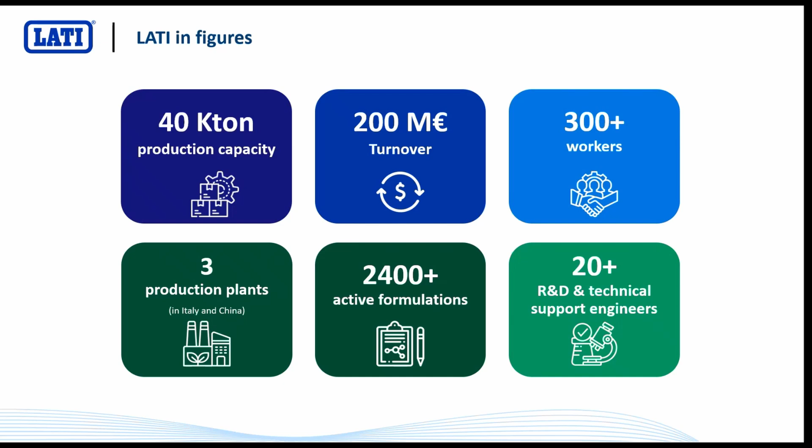But 2,500 grades is a lot to try and get your head around, and I'm not going to try and cover all of those in this presentation. But let's just take a quick look at some of the sorts of materials that LATI offers. The headline point here is that we focus on high performance materials with enhanced functionality.

If we start by looking at the polymers that we offer, well, it is everything from polyprop to PEEK, and it's semi-crystalline materials and amorphous materials. For LATI, let's say a standard entry-level material might be something like a 20 or 30% glass-filled nylon, and typically then we would go above that in terms of complexity and performance of polymers. Where we do dip down into the commodity materials at the bottom of the polymer pyramid, it would always be with some other functionality, be that conductivity, flame retardancy, and so on.

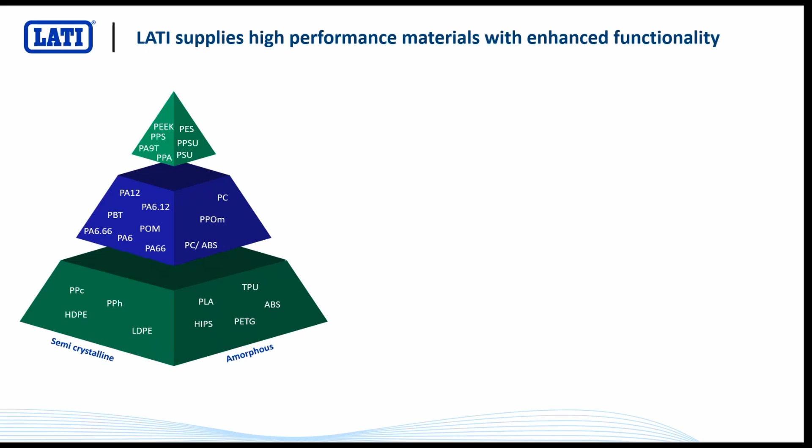So let's have a little bit more of a look at what those functionalities are. I'm not going to go through all of these today, but just give you a flavour of some of the more common ones.

Let's start then with structural materials, and we're going to look at these in a bit more detail today. These are grades with very high loadings of reinforcement, designed for the most mechanically challenging applications—like we're going to talk about today, applications for replacing metals in many cases.

Flame retardants is where LATI made its name. This is our biggest range of materials, flame retardant materials, and it's been that way since the company was founded, more or less. Of the 2,500 grades that we currently produce, around 300 of those are grades with active UL yellow cards, and we have lots of other flame retardant certifications and approvals beside that. We have grades based on everything from what we might call the traditional halogenated flame retardants and red phosphorus systems, through to systems that are halogen free, red phosphorus free, and increasingly important, grades that are free from antimony trioxide.

After the flame retardants, the next largest family within our range is the self-lubricating materials. Again, much like the flame retardants, we have self-lubricating grades based on everything from polyprop at the bottom of this pyramid all the way up to PEEK at the top, with multiple grades based on each polymer. And like the flame retardants, with the self-lubricating materials, we have different ways of achieving the target performance.

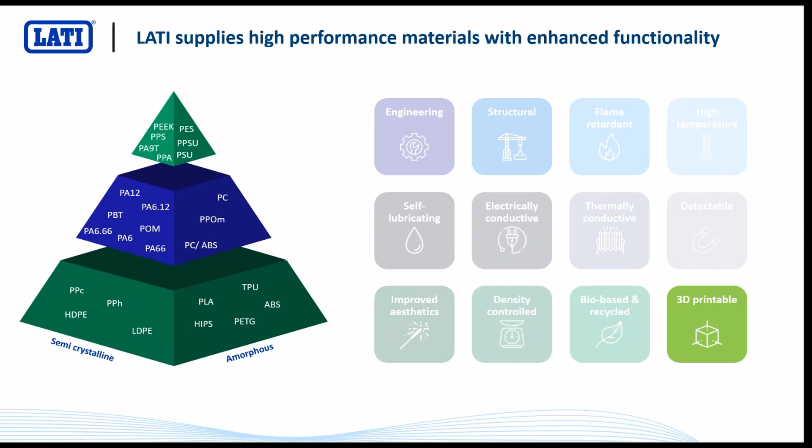One of the big applications we're working on at the moment is mold tooling for composites processing, the sort of thing you might find in high-performance, low-volume vehicles. We also have materials that can be used for large-scale prototyping, such as aerodynamic or ergonomic assessments.

We have a global presence. We're particularly strong in Europe, but we have direct sales presence in a number of areas, including manufacturing, as I mentioned, in China. We also have a partner in the US that we use for toll manufacturing and distribution, so we're able to offer locally produced, locally manufactured compounds to our customers in the US as well as in Asia.

And very recently, in the last couple of weeks, we've just announced a new joint venture with a compounder in India, which again gives us the facility to manufacture and supply locally manufactured products to our customers in India and in that region as well.

Finally, then, a quick look at some of the applications that we support.

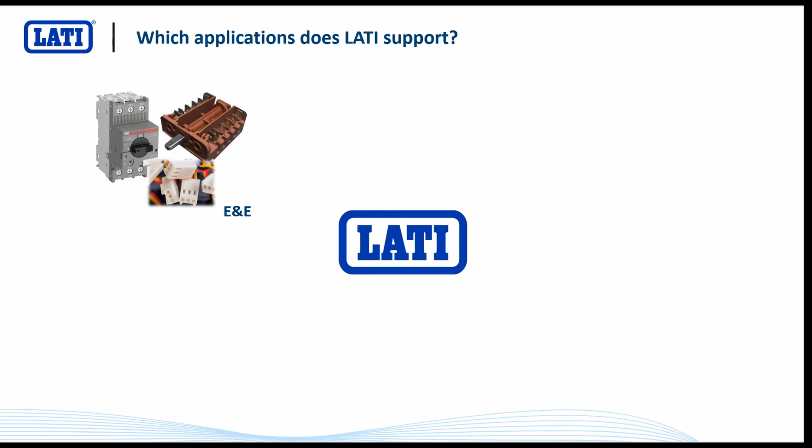The biggest area for LATI is the electrical and electronics market. This is a market with very stringent performance requirements, fire performance typically, but we also have applications for self-lubricated materials. We're talking about parts with very tight dimensional tolerances, and generally high volume applications as well. So high volume, strong technical requirements.

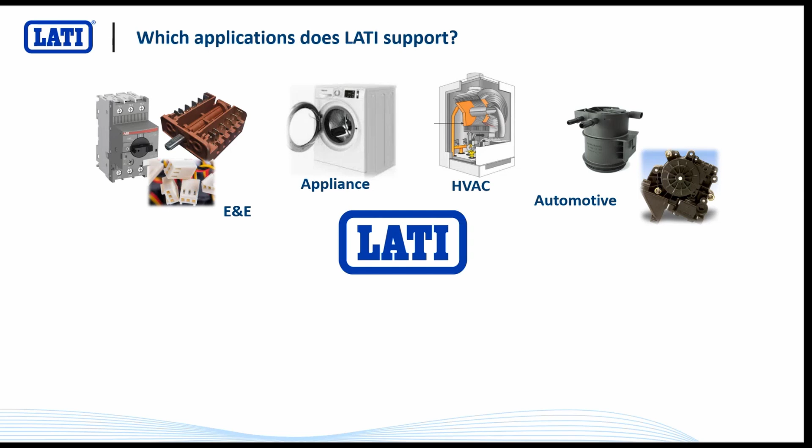Similarly, in appliances, this is another area with very stringent fire performance requirements, but also requirement for very high volumes of material. Other areas we work in include HVAC, automotive, so we are IATF certified. We supply a lot of materials into food and water applications, so we have grades that are EU food and water contact approved, FDA approved, and so on. Lighting I've mentioned, and we'll talk about a bit more later. We work in railway, medical, safety, and a variety of industrial applications.

So I guess the common thread here is that all of these are demanding applications, high performance requirements, often requiring high volumes at the same time.

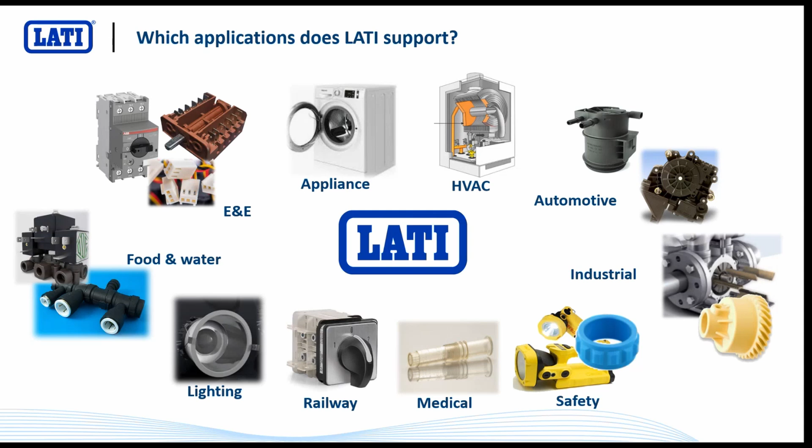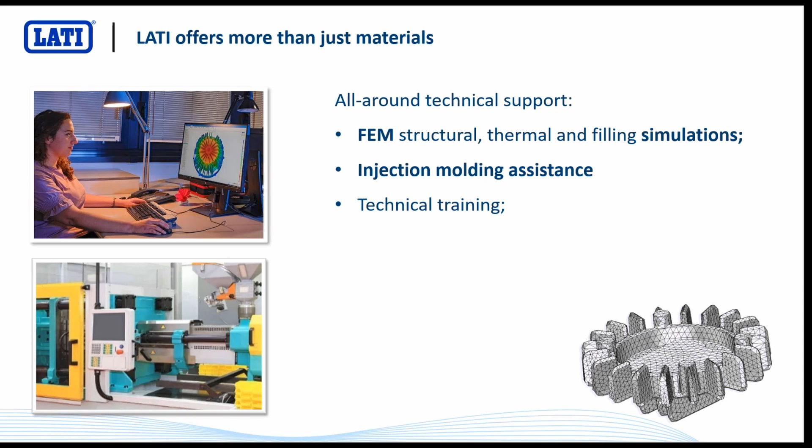And as I said right at the start, with LATI, it's not just materials, it's the complete package of services as well. That might involve things like providing structural analysis, thermal simulations, filling simulations - we'll have a look at some of those shortly. It might be hands-on assistance with the injection molding process itself, or some technical training for our customers. And if we're talking about developing new materials, then that obviously involves extensive R&D work, lab testing, and continuous product tuning.

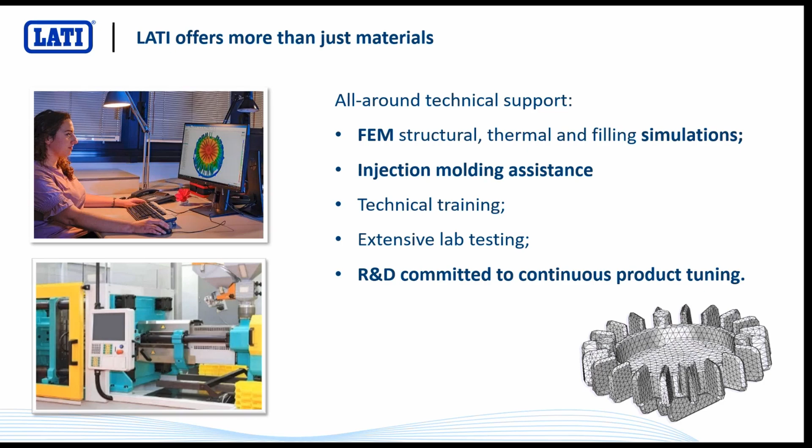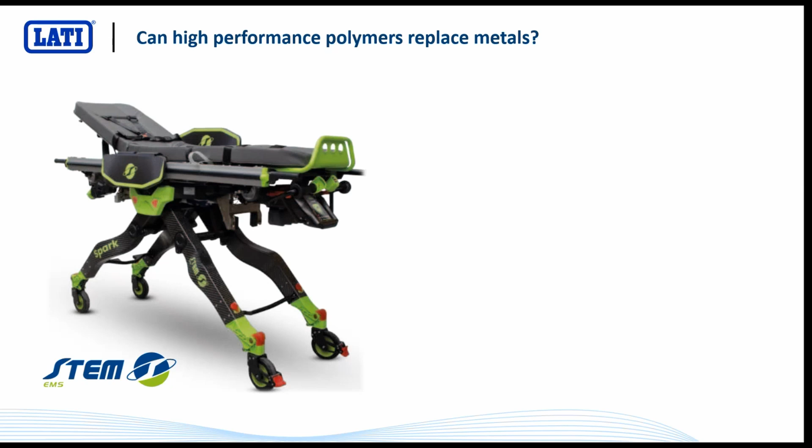Okay, so that's enough intro for one presentation. Let's get on to what we really want to look at today. Really it's to try and answer this question: can high performance polymers replace metals? And we're going to try and answer that question by looking at a couple of case studies. The first one is this robotic stretcher, and the second one is an LED lighting device. So let's move straight on to the first one.

So case study number one is what's called the STEM Spark. It's the world's first robotic electric stretcher. Quick introduction to STEM - they're an Italian company specializing in retractable steps of various types, for industrial or marine applications, also for medical applications. So the one we're going to look at here today is this medical application.

Yes, for this robotic stretcher. So let's take a closer look at it. I guess the key features of this are its robotic undercarriage and the ability to handle multifunctional accessories.

To give you a bit of background, this Spark product was originally designed to accommodate highly infectious patients, around COVID time. You can see here in this picture this isolation unit which sits on top of the main body and legs of the stretcher. It's got all sorts of ports to allow medical professionals to access patients safely, and also to keep those patients isolated at the same time, and various ports for connecting different bits of medical equipment, machinery, and monitoring.

So that was the original intention of this device. And then as that big surge in demand and requirement for isolation tailed off a little bit, as COVID was brought more under control, this product was reimagined more as a general purpose multifunction device, initially designed for the US market.

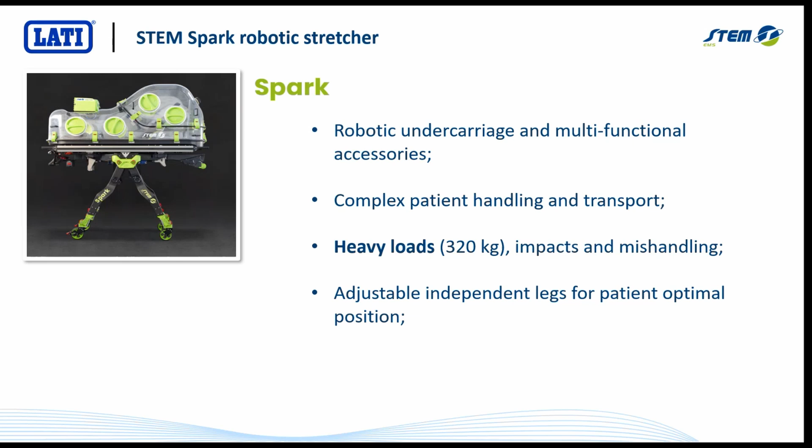One of the key features of the device are its independently adjustable legs for making sure the patient is in the optimal position. We'll see it here in, let's say, a standard configuration, but each pair of legs, front and back, can splay out independently of each other. The idea is that you can always keep the patient in an optimal position. Here it's shown on an incline, but more commonly you'd be keeping the patient horizontal as the legs adjust to deal with inclines, as you're moving the patient around or getting them on and off an ambulance.

So what you need for all of this is something that's lightweight, and it's got to be impact resistant. You'll probably see that for the main body of the legs here, these are made of carbon fiber material, so lightweight, strong, stiff materials. You need something that's resistant to the cleaning fluids and various other things you'll find in a hospital setting. It's got to have this overall structural lightness and impact resistance, so high performance plastics are an ideal candidate for this sort of thing.

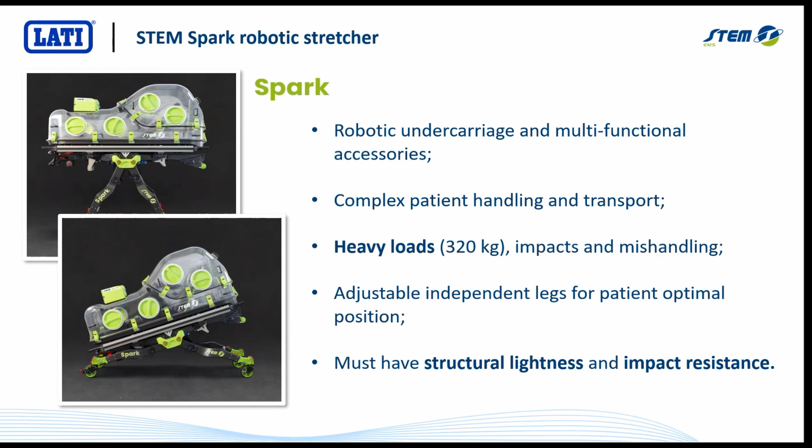Of course, it's got to have this static load resistance, but also creep resistance as well. We talked about impact resistance. Dimensional stability is very, very important - is it going to retain its shape post molding?

Particularly important for two things. Firstly, you've got those two components that need to be able to freely move past each other, so it's no good if you've got distorted parts coming out of the molding. And then also, this section of the part fits inside the carbon fiber tube of the leg, so it's important we've got tight dimensional tolerances so we can correctly fit this into the leg and connect it accordingly.

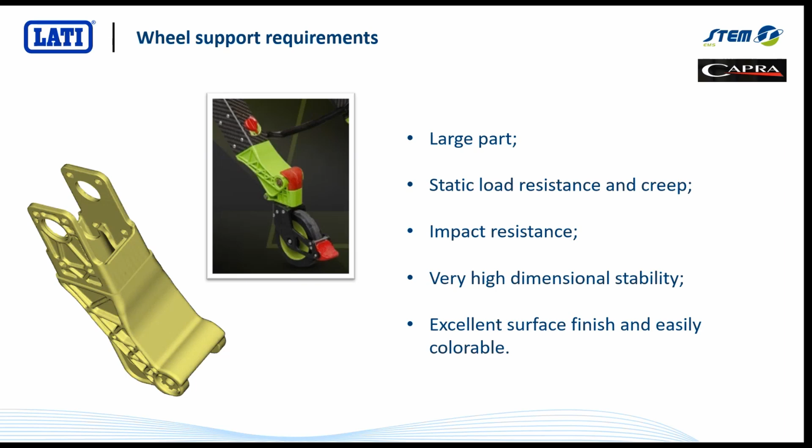Step one then is choosing what we think would be a suitable candidate material. Fairly obvious looking at the mechanical requirements, we're looking at something from within LATI's structural material range.

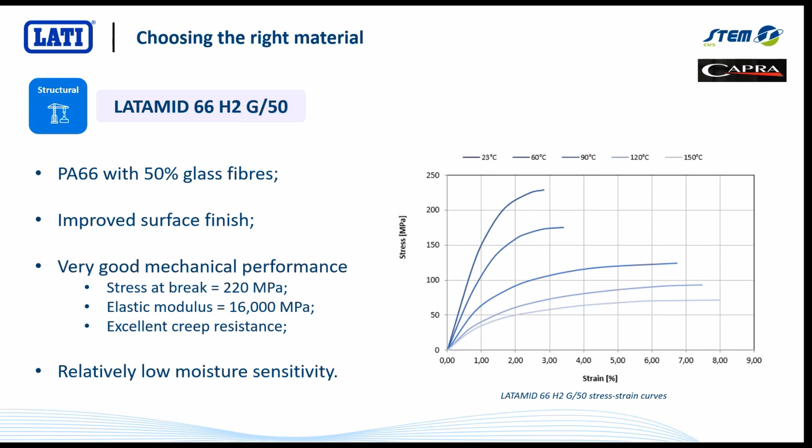The material we opted to open with here is a material we call Latamid 66 H2 G50. This is a nylon 66 with 50% glass fiber, amongst other things in there. It's a grade with improved surface finish and very, very good mechanical performance - strength above 200 megapascals, modulus around 16 gigapascals, and it has the excellent creep resistance we need for this application. Just a note, you might be thinking, why don't we use carbon fiber rather than glass? Too brittle for an application like this, really. If we want good impact performance, glass typically has better impact performance than carbon. So glass is the reinforcement we need for an application like this. And for a nylon 6/6, it's got relatively low moisture uptake, this material.

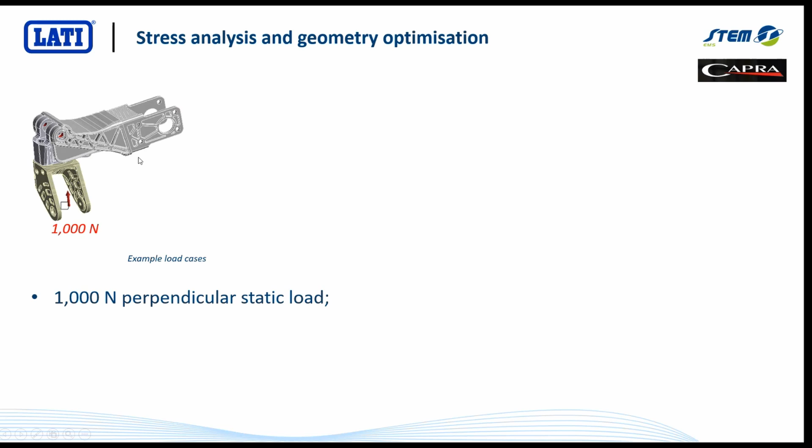Once we've picked a material we think is a good candidate, the next thing we would do on a project like this is carry out some structural analysis. These are some of the loads we looked at, and some of the requirements from STEM - we've got static loads, in this case with this component perpendicular to the load. We need to think about lateral loads as well, in combination with those perpendicular loads, and we need to consider all these different load cases with this hinged component in different configurations - in what would be the fully flat position, but also the fully open position as well.

The customer set some pretty high impact load requirements for this application, and I'll be honest, this was a very challenging impact load to try and meet. I think it's fair to say the simulation never quite showed that this was met. It was really a case of getting as close as we possibly could to enable the parts to go into real world testing with reasonable confidence that it would deliver the desired performance. So that was really the target here, around this 8,000 Newton impact load.

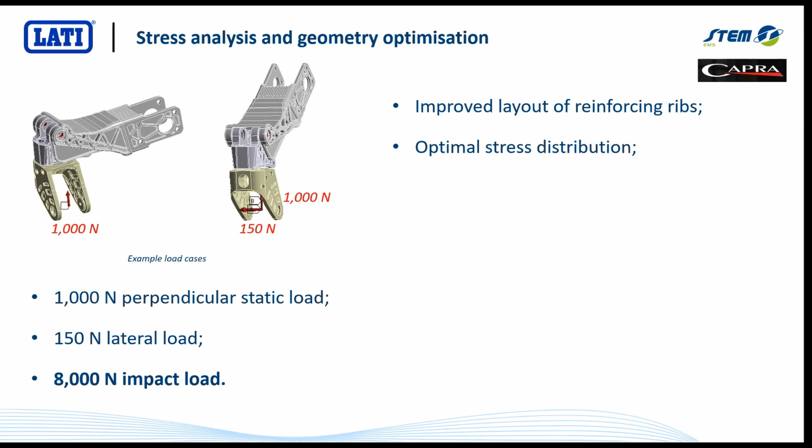As we're doing all of this analysis, we're making modifications to the geometry and layout of the part. In this case, we had to look at the layout, positioning, and thickness of the reinforcing ribs to ensure we get this optimal stress distribution so the part can withstand the desired loads. Ultimately, we go through several iterations until we get a geometry that fulfills as closely as possible the requirements of the application.

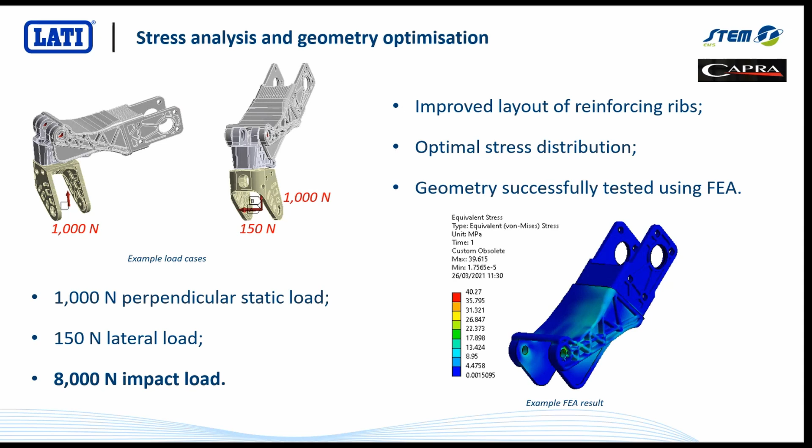So we're now at a point where we have a design we think is going to work. The next thing is, okay, can we actually make that part? And this is where the molding analysis and tool optimization comes in.

I'll be honest, in this project there were a few problems detected by this analysis. One of the big problems was differences in volumetric shrinkage. Normally this is something we'd address by reducing wall thickness, but in an application like this, where we're pushing the boundaries of the mechanical performance we need, it's not as easy as just taking thickness out of the part. That's not really viable.

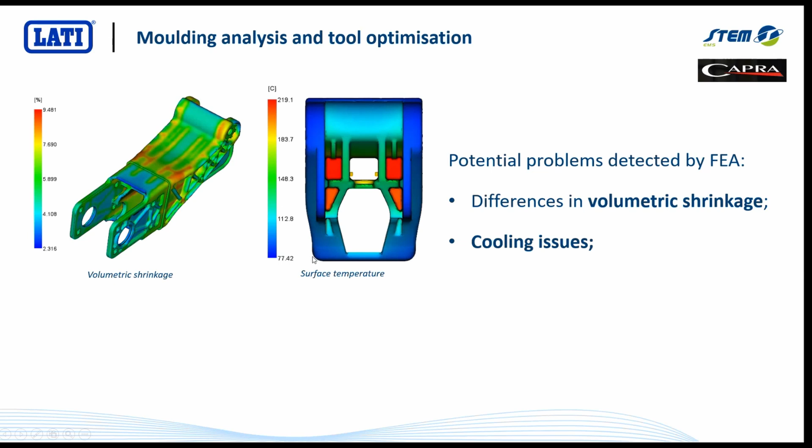There were some cooling issues too, again partly linked to differential part thickness. You can see significant differences in surface temperature of a part as it comes off the tool - as low as less than 80 degrees in some places, but higher than 200 in another. This is the sort of thing that's obviously going to contribute to significant deformation as you demold the part, so something to be avoided.

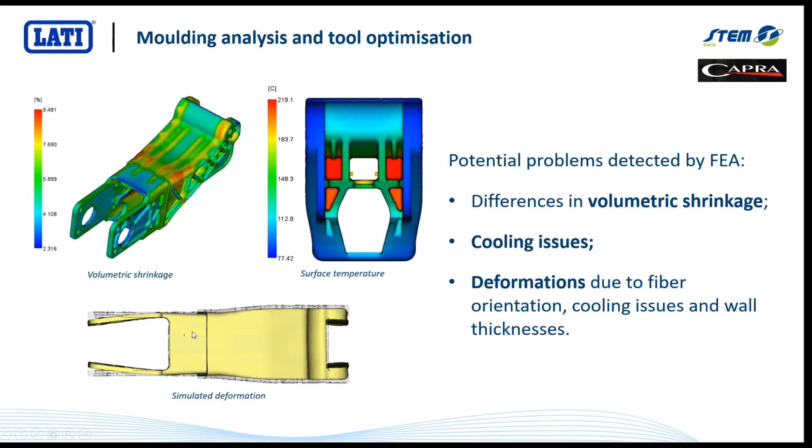If you simulate the deformation that comes from a combination of those two effects above, plus any fiber orientation we get during molding, then what we were looking at is something like this - and this is clearly no good, because this is the end where we want to fasten into the carbon fiber legs.

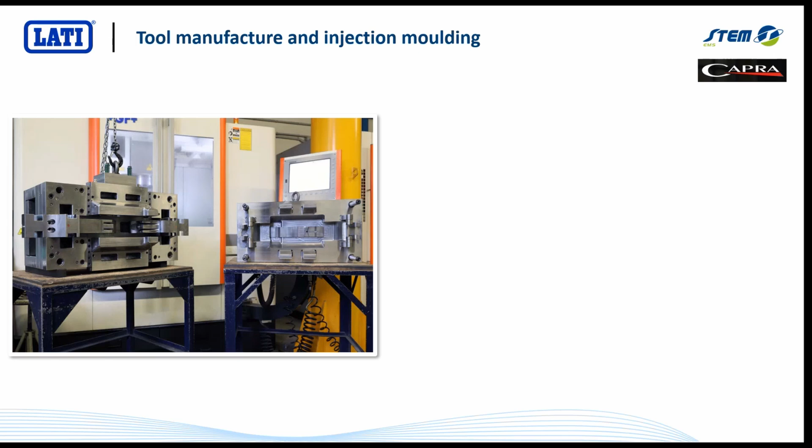At this point it's worth saying this is where it really helps to work with a specialist technical molder who's got experience working with high performance materials like this. Really, Capra Plast took over, and using the information we provided from the analysis, they were able to make a number of modifications to get a part that would actually come out looking like we wanted.

That involved optimizing injection molding locations to get a better fiber orientation in the part. The other big thing it involved was designing improved cooling channels to avoid those big fluctuations in surface temperature that we saw on the previous slide. Through their expertise they were able to do all of this, and the result was a compact and relatively lightweight tool to make these parts.

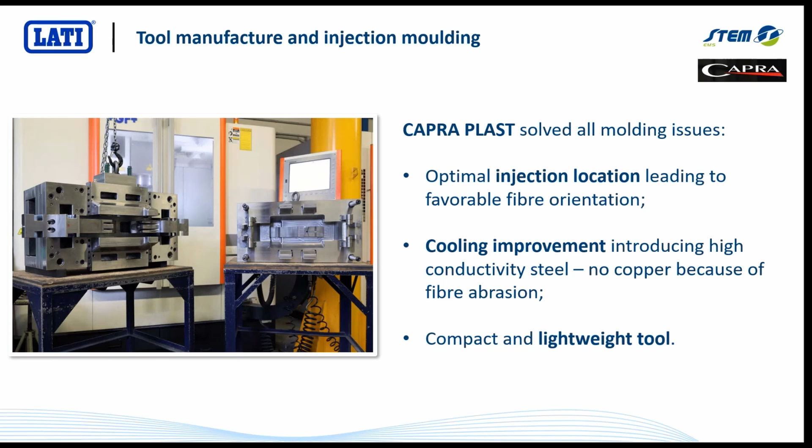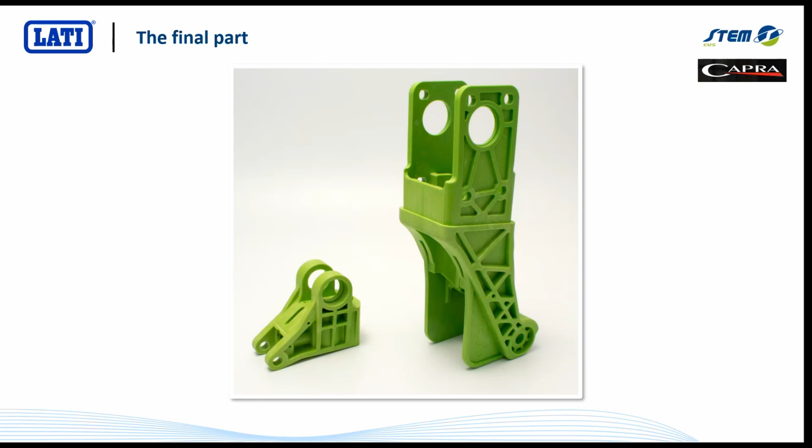So that's case study number one. The second case study we're going to look at is this high-powered LED lamp from Vossloh-Schwabe. If you're not familiar with Vossloh-Schwabe, they are a technology leader within the lighting sector, with a product portfolio covering all kinds of lighting components - everything from lamp holders to LEDs to the various bits of electronics used around all of that. They're a German company with production and sales sites across the world, and this particular case study is one that we developed with their Italian team.

So the product is known as Brave. That's the family name, and it's intended as a modular plug-in replacement for traditional outdoor spotlights. So things like street lighting, industrial lighting, sports facilities, and so on.

Some of the key requirements are IP67 rating, so moisture ingress protection and UV resistance. Must have corrosion resistance, so you imagine all sorts of public places with various fluids and animals that need to be dealt with, and we need to avoid corrosion from all of those sorts of things. So that rules out aluminium in this application. It needs to have a very, very high life expectancy as well.

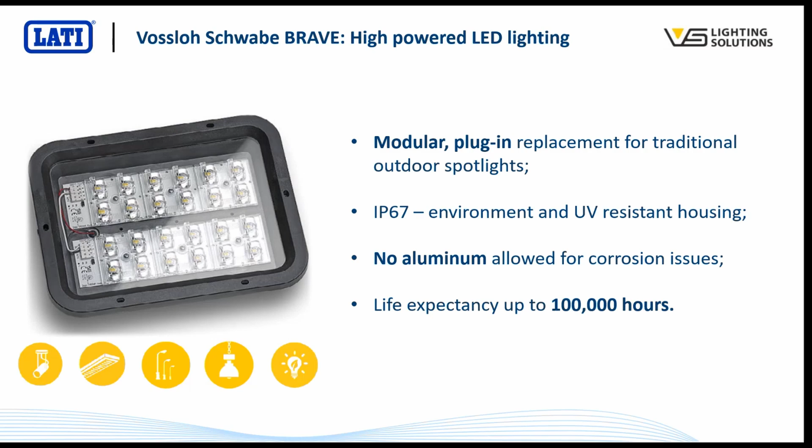So let's start by taking a look at how these sorts of LED lighting modules are typically constructed. So in the diagram here, you'll see we have the LEDs, surface-mounted LEDs, and electronics sitting behind glass. Heatsink is in direct contact behind, and then the whole thing is in a frame, which can be mounted to all sorts of different housings, and there's a gasket in there to keep the moisture and dust and whatever else out of the sensitive bits inside.

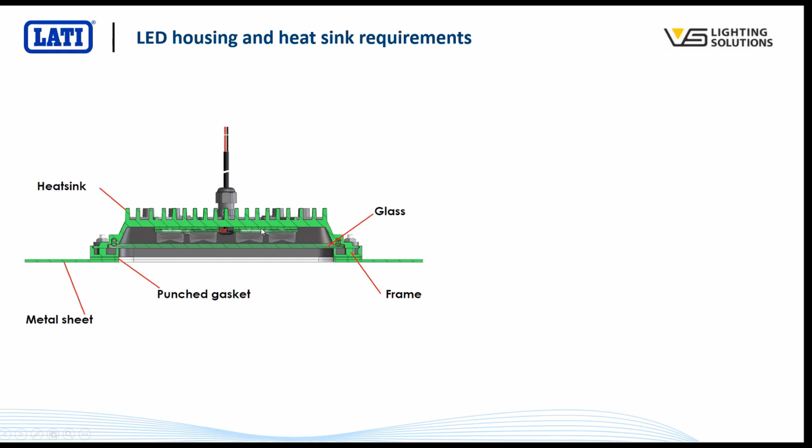So the key requirements of the heatsink part here, which is what we're focusing on, it must have outstanding thermal conductivity. This product is available in a few different configurations, but the highest power one of those is up to 44 watts. So that's quite a lot of heat being generated that we need to get away from the electronics if we want to maximize this lifetime.

We must have dimensional stability. So for the heat sink to work effectively, it has got to be in contact with the components that are generating the heat. We don't want an air gap between those two things. So dimensional stability is important to make sure that we maintain that good physical contact. We need an absolutely flat molding. Otherwise, we're either going to have an air gap, or we're going to have to start using thermal interface materials, which adds an extra process, adds extra costs to the production of these units.

Dimensional stability is also important because, remember, this is a retrofit device. So if we want to take this and plug it into some existing housing somewhere, it's no good if we've got a variety of shapes and sizes because we've got warped moldings.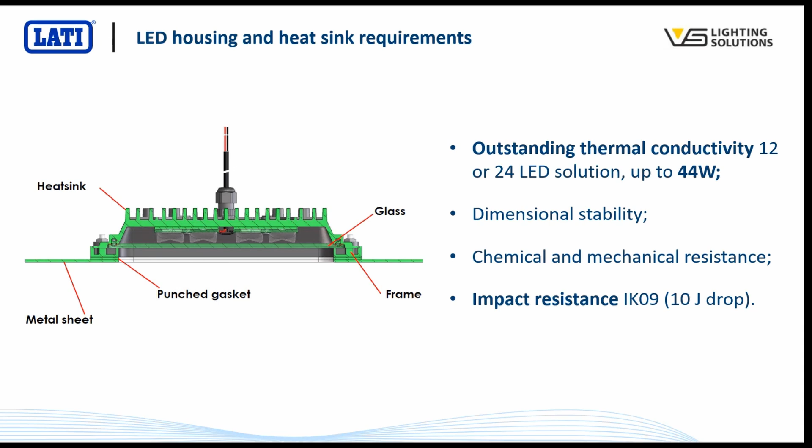Chemical resistance, we talked about. Mechanical resistance is also important too. So these units are going to be installed in industrial areas or public areas. So knocks and scrapes, whether accidental or deliberate, are going to occur. We also need to take into account impact resistance as well. In this case, there was a particular drop test that needed to be successfully passed.

So again, as we did last time, let's start by looking at what sort of material we might use. And I think fairly obviously here we're looking at something from within LATI's thermally conductive material range. In this case, the grade we looked at is LATICONTHER 62 GR/50. This is a nylon 6 material with 50% graphite in there as the thermally conductive additive. So this is a grade with outstanding thermal conductivity. In fact, it's one of LATI's most thermally conductive grades.

It's a grade with improved flowability, so when we look at some pictures later of the part, you'll perhaps appreciate this a bit better. For applications like this, it's quite common to have complex shapes, lots of right angles and corners in there, sometimes relatively thin sections. So good flowability is critical for these sorts of applications.

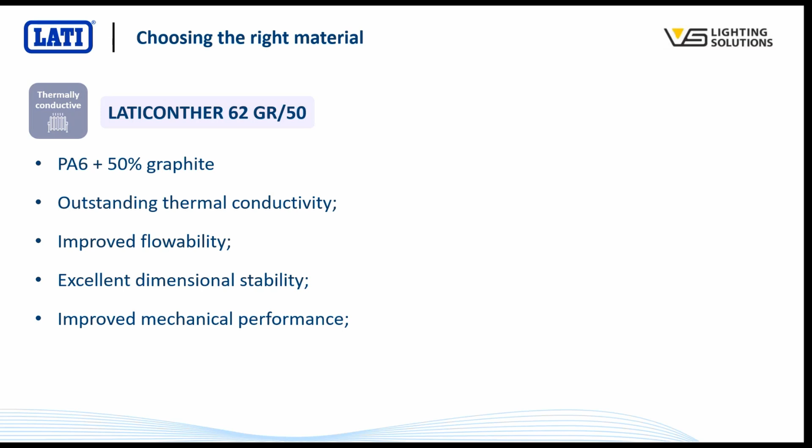We've talked about dimensional stability, and this grade is excellent for that, to maintain that good thermal contact between the heatsink and the heat source. Even though this is a highly filled grade, it still does have very, very good mechanical performance. It also has the ability to withstand self-threading screws.

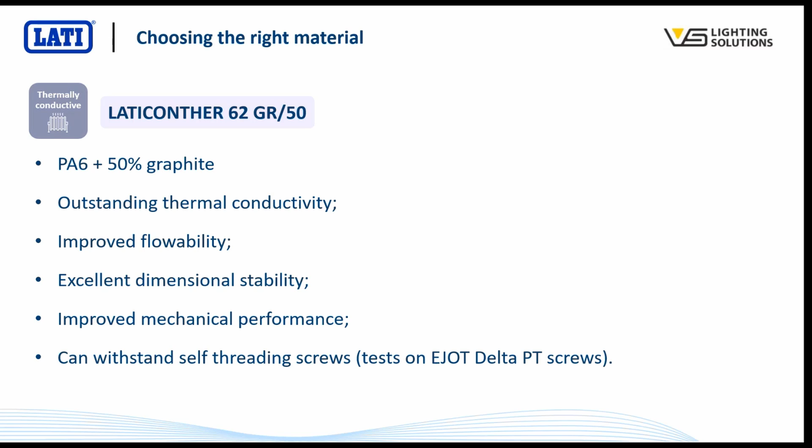Again, particularly important if we're looking at being able to retrofit this thing in a variety of different existing housings. So LATI's done quite a lot of extensive testing looking at different self-threading screws and how well or poorly different materials can accept those. So we have lots of other information available on that. If you're interested, we can make that available on request.

So I guess at this point, I usually like to address the elephant in the room. When we're talking with customers about replacing metal heat sinks with plastic, the big question that always comes up is: can the polymer compound conduct heat as well as aluminium? Well, let's have a look at the data.

We'll look at the thermal conductivity of aluminium versus a couple of different families of thermally conductive plastics. The one we've chosen for this application is in this family, based on graphite as the conductive additive, but we also have others which use ceramics instead of graphite. These have particular uses in applications where you want thermal conductivity but absolutely don't want electrical conductivity.

So let's look at the thermal conductivities. For aluminium, you have a thermal conductivity in plane, along the length of a part, of around 110 watts per meter Kelvin, for die-cast aluminium. Because aluminium is an isotropic material, with the same properties in all directions, the thermal conductivity is exactly the same through the thickness of the part as it is along its length.

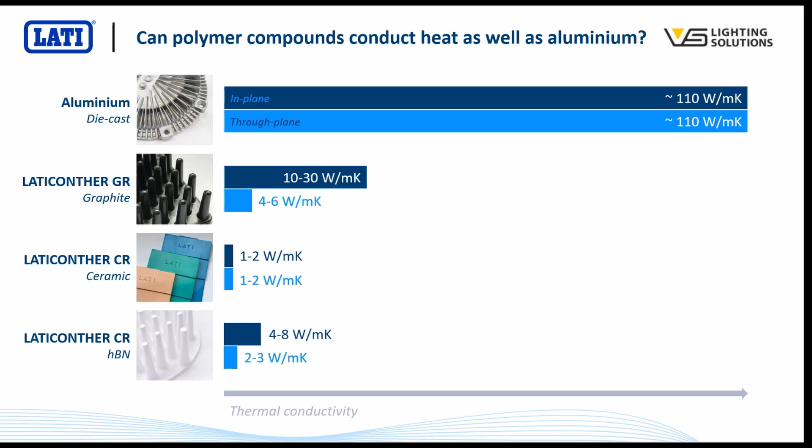So on the face of it, it doesn't look so good for the conductive plastics. But the key point to remember is that for heat dissipation applications, thermal conductivity is not the critical parameter we need to look at. We actually need to think a bit more about how the heat transfer is occurring in these systems.

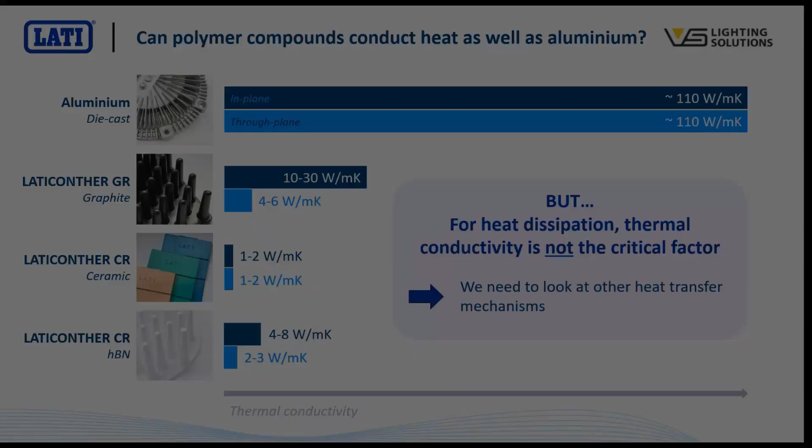At this point, we'll take a brief interlude and revisit a little high school thermodynamics, reminding ourselves of the different heat transfer mechanisms. First, we have conduction - we've got a heat source and heat is transferred through some other object. Here's the heat source, here's the object dropped on top, and conduction is all about heat being transferred through this solid object to its surfaces.

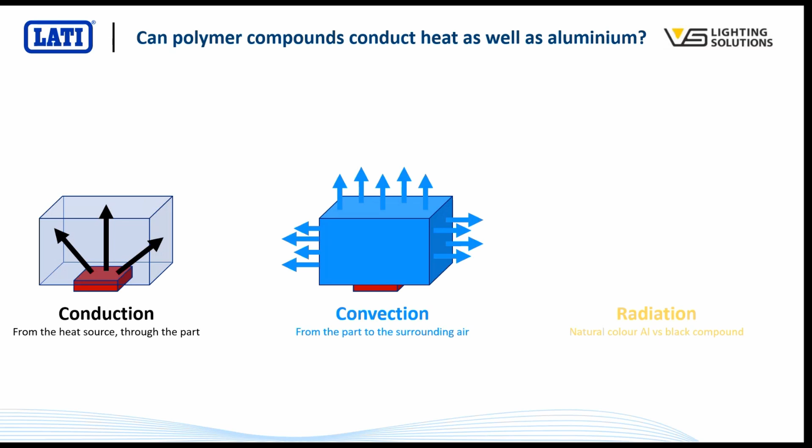Then we have convection. Our part is now being heated up, and convection is all about the heat then being transferred to the surrounding air, or more accurately, the surrounding fluid, whatever that may be. And then finally, we have radiation - this is emission of electromagnetic radiation, and this occurs for any object sitting above absolute zero.

So let's have a look at how plastics and metals compare in these scenarios. We've just seen the data for conduction - aluminium is miles better than a polymer compound.

Now for radiation, it kind of depends, but if we're looking at a natural silvery coloured aluminium versus a black thermoplastic - and these are black because graphite gives that colour to the final parts - then actually a polymer compound radiates heat better than aluminium. But in heat dissipation applications like this heat sink, the dominant heat mechanism is convection.

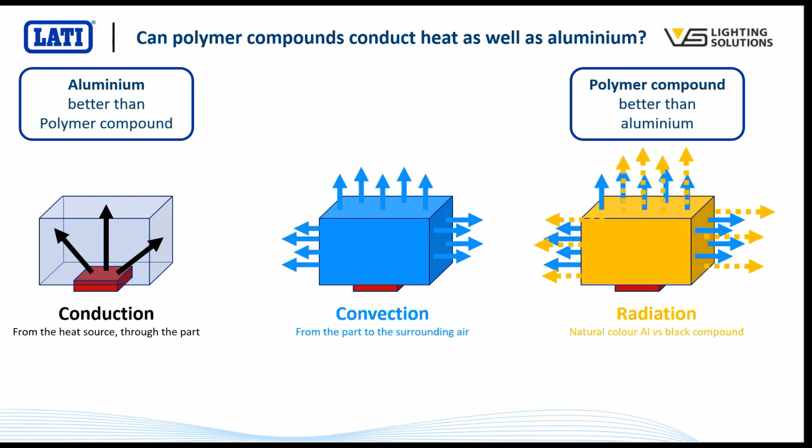We're wanting to take heat from the part and transfer it to the surrounding air. What we find is that aluminium and polymer compounds behave very similarly, providing we have a thermal conductivity of around 10 watts per meter Kelvin or above. As we saw with the previous slide, we comfortably meet that with the thermoplastic. This value came from extensive testing at LATI, and also independent testing carried out by Vossloh-Schwabe, to arrive at this 10 watts per meter Kelvin figure. So this is the key thing to remember: don't focus on absolute thermal conductivity. As long as we've got a value around 10 watts per meter Kelvin or above, a thermally conductive plastic can dissipate heat just as well as a metal can.

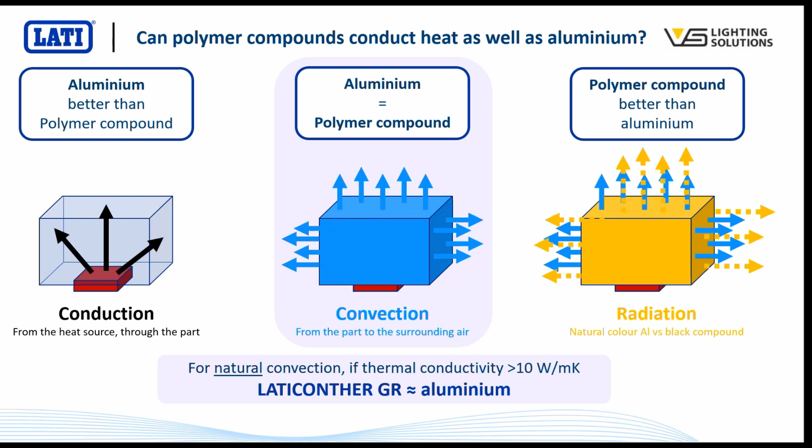I think hopefully we've convinced ourselves that plastics are a good option from the point of view of low corrosion, lightweight, and that they can do the job from a thermal conductivity point of view. It's also worth looking at how they perform environmentally. Plastics get a bit of a bashing most of the time - sometimes it's justified, often it's not. So let's look at how the environmental performance of thermally conductive plastics compares with aluminium.

We'll look at the cradle to gate global warming potential of the different materials - the global warming potential of the raw materials as they leave the factory. So the plastic pellets as they leave LATI's factory, before they go to the injection molder to make final parts, and the same with the aluminium as it leaves the refinery, before it goes to the foundry to cast the aluminium heat sinks. If we look at the global warming potential for aluminium, it's around 9.7 kilograms of CO2 per kilogram of material. This is data from the European Aluminium Association's most recent environmental profile report, taking into account aluminium consumed in Europe. That aluminium might be sourced from all around the globe, but it's intended to represent the product mix actually used in Europe.

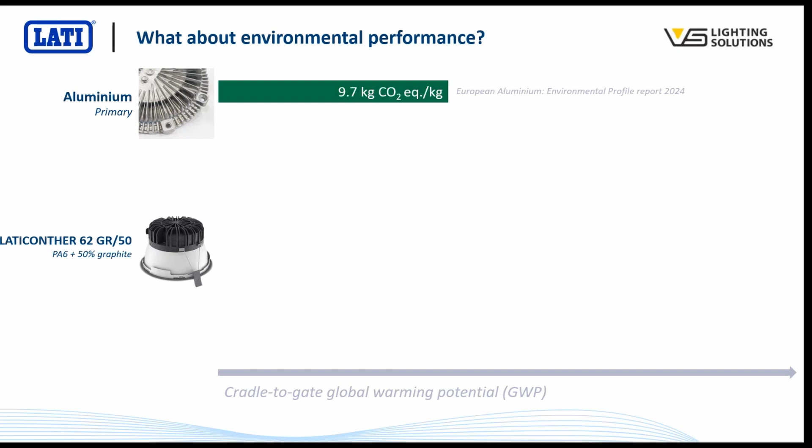If we look at the plastics, using LATI data, we see it's slightly better at 6.5 kilos of CO2 per kilo of material. But actually this isn't really the right calculation, because if we swap out an aluminium heat sink for a plastic one, those two things aren't going to use the same mass of material - the density of aluminium is almost twice that of the thermally conductive plastic.

So a more accurate comparison is to look not at kilograms of CO2 per kilogram of material, but at kilograms of CO2 per unit volume of material. If we do that, we get a figure of around 9.8 kilos of CO2 per cubic decimeter for the LATICONTHER 62 GR/50, and for the aluminium we're over 25. So much lower GWP for the plastic version versus primary aluminium.

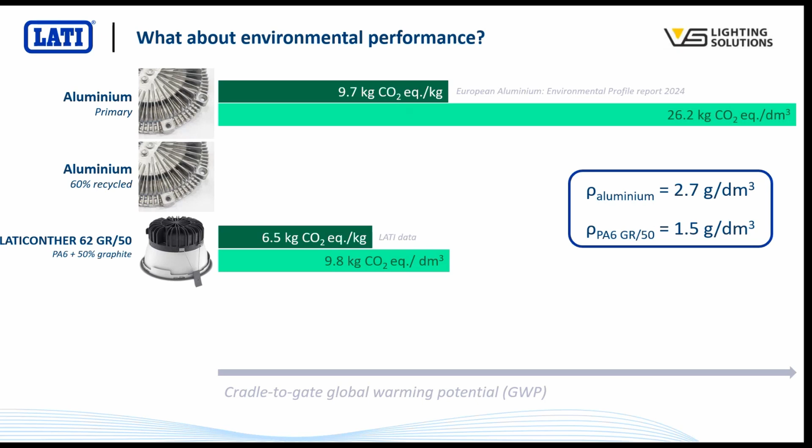At which point you might say, well that's great, but nobody uses primary aluminium - everybody uses some recycled content in there. But even if we allow for using up to 60% recycled aluminium, we still see a reduction in GWP for the plastic versus the aluminium version.

Remember also that this is just cradle to gate, so we're not considering any processes further downstream. We haven't yet considered that energy consumption for injection molding, running machines at maybe 250-300 degrees C with tooling at 90 degrees C, is going to be much lower than for aluminium die casting, where we're melting material at maybe 700 degrees with mold tools set around 400 degrees. We also need to consider lifetime of tooling - with injection molding we can get maybe 500,000 parts or more from a single tool, while with die casting maybe 50,000 if we're lucky before needing new tooling. And we haven't considered shipping parts around the world - are we shipping lightweight plastics or heavy aluminium parts? All of these things work in the plastic's favour.

This is also before we consider any sort of recycling on the plastic side. Here, of course, we've considered using 60% recycled aluminium. What we find is it's possible to regrind and reuse this material with no loss of mechanical performance, no loss of thermal conductivity. So we could improve this even further by taking some reground material from here, as is common in injection molding, and using that to make new parts.

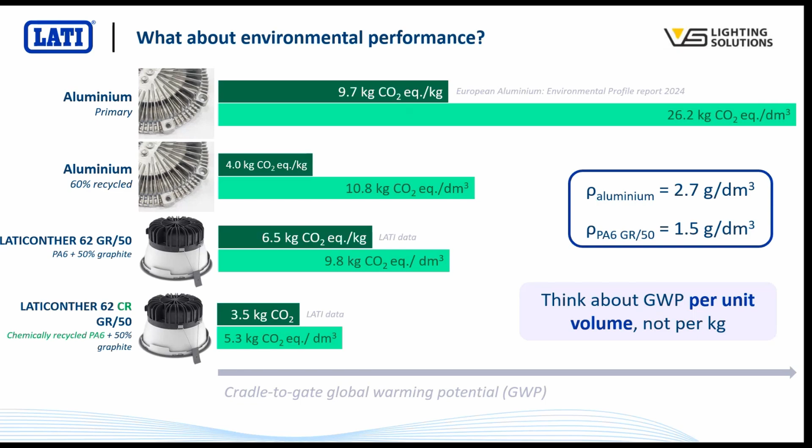At this point, I think we're convinced that plastics will tick the box from the point of view of non-corrosion, thermal conductivity, and environmental performance. What about fire performance? Well, yes, we can tick that box as well. As I mentioned at the start, flame retardancy is where LATI made its name, and it's where we have extensive expertise, which we apply within these thermally conductive compounds too. So the full range has UL approval, and we also have UL94 V0 grades available if required.

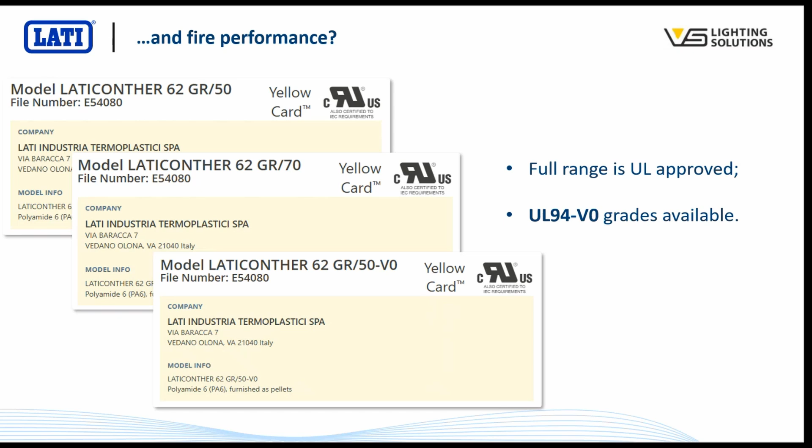So we've taken a brief interlude here to convince ourselves that thermally conductive plastics are up to the job technically and commercially. Now let's get back to the part in question and look at some molding analysis and tool optimization. There are two things we can do here. Firstly, we can carry out the standard mold flow and FEA analysis, and in this case we highlighted some issues again with the first iteration of the parts.

Issue number one, exactly the issue we don't want, is some out-of-plane deformation on the base where the PCB and the LEDs are going to be mounted — very bad news for maintaining good thermal contact, so that needs to be mitigated. The other thing we noticed, which you can maybe pick up on this drawing, is a bit of deformation around the rim of the part. This is bad because this is exactly where the gasket would sit, which gives us the IP rating and keeps moisture and dirt out from the electronics. So we need to mitigate this deformation as well.

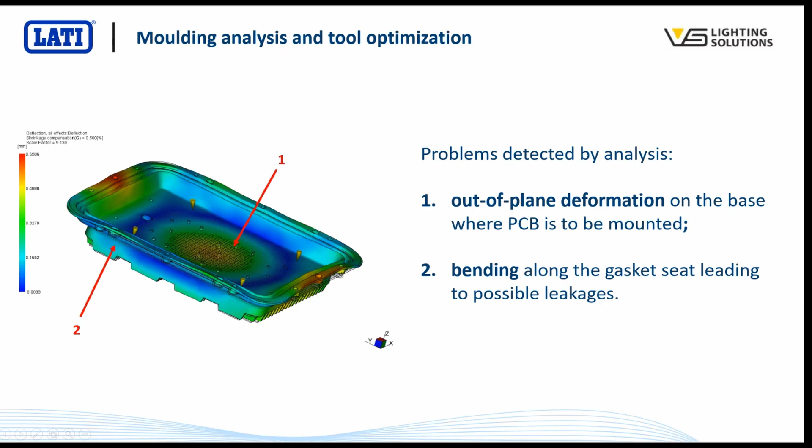The other thing we can do is combine mold flow with thermal simulation to help us evaluate the cooling efficiency before we even start cutting tooling and making parts. I don't have time to go into all the detail of how we do that in this webinar — we have separate webinars and guidance notes on that if you're interested. But what I want to point out is that, because of the directionality we get with graphite-type materials, and how flow paths can affect thermal conductivity, the geometry of the part — wall thicknesses, flow paths — will all have a big influence on the ultimate thermal conductivity of the final part.

So this is just a generic example here, but you can see, just by designing or adjusting how we might design the cooling elements, we get a big difference in these things. Let's say our heat source is down here. We want to get that heat up and away from that source and away from the sensitive electronics. We can see that this fin configuration, generally speaking, is better to do that, because we're getting higher surface temperature up at the top, away from the sensitive electronics below, versus this pin situation where we're not getting quite so much heat being transferred up to the top, which means it's remaining down here, which is bad for our parts.

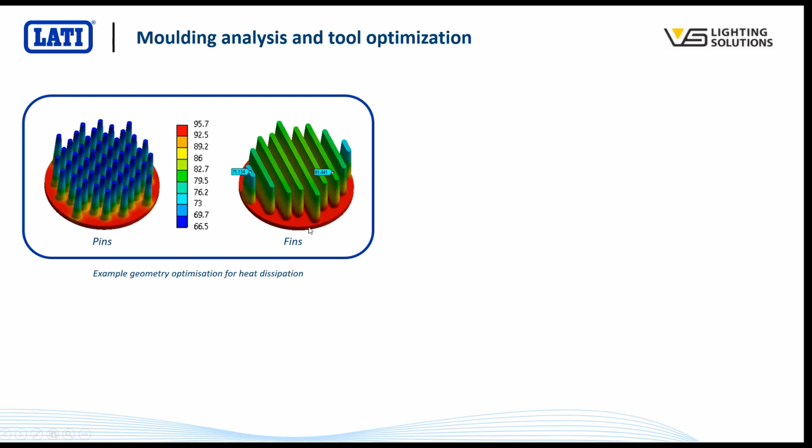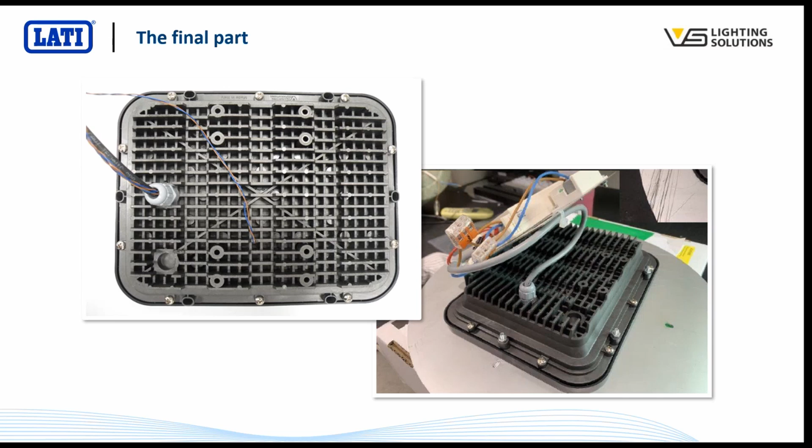So here is the final part. You can see here again, as I mentioned before, we've got some quite intricate design. We've got quite a lot of corners here, so this is why flowability is important. We've got a nice surface finish, we've got something that's flat. We can mount it into a variety of different housings, and we can tick all of those boxes for thermal conductivity, dimensional stability, surface finish, corrosion resistance, with a lightweight part that has lower environmental impact than the aluminium alternative.

Okay, thanks for sticking with us throughout this webinar. Just to quickly summarize then, it is possible to replace metals with high-performance plastics. To do it, you're going to need some special, optimized thermoplastic compounds. Today we looked at structural and thermally conductive materials. We could have picked some case studies for electrically conductive materials, ones with improved aesthetics, high temperature ones, and maybe we'll revisit some of those things in a future webinar.

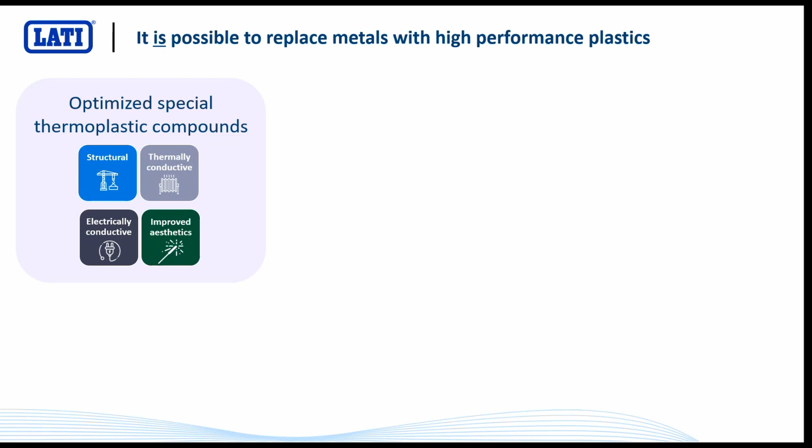You need to have well-designed components, so it's important to recognize that these high-performance materials are not always simple drop-in plug-and-play solutions. You probably are going to need a bit of specialist support to help you design the parts and design the tooling, and that's absolutely something that LATI can help you with.

And then you've got to process those materials correctly. So if you're an OEM listening to this, then I would say working with an experienced molder is definitely a big advantage if you can find one, and we can help point you in the direction of those people. But if you're a molder listening to this and all of this is kind of new to you and you're wanting to take your first steps in this area, then absolutely come and talk to us, because LATI can help you build that expertise in working with these materials, designing with them, and optimizing geometries and so on. So please do come and talk to us on that.

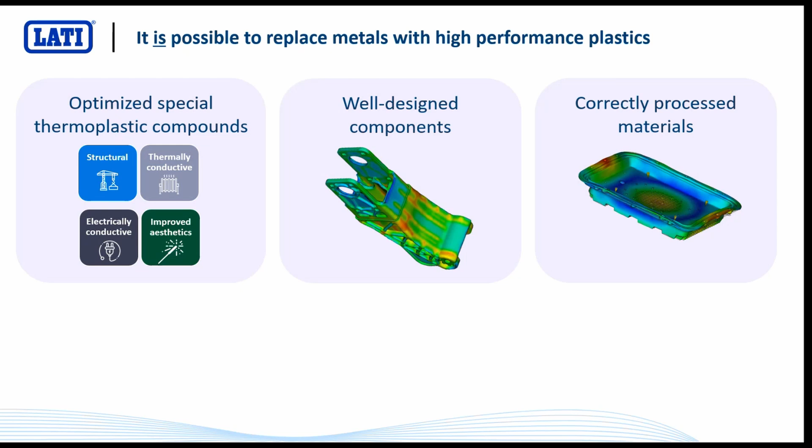So if you can put all of those three components together, then absolutely it's possible to achieve component lightweighting, reduced environmental impact, improved corrosion resistance, and you might even be able to reduce costs at the same time.